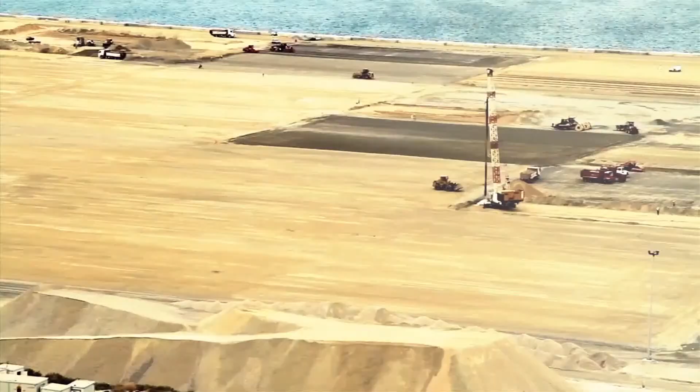What if you could reduce your construction carbon emissions right now? Building materials are responsible for 11% of global carbon emissions, among which 19% accounts for the reinforcing bar's embodied carbon emissions in reinforced concrete structures.

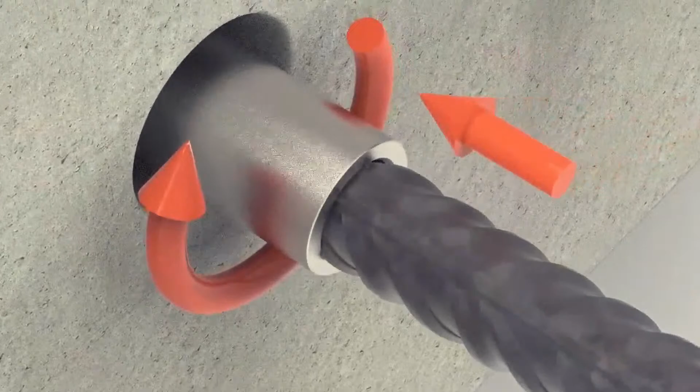However, a sustainable solution already exists to change the future of our industry. STARS splicing technology allows reduction of steel. Thanks to its 35 years of pioneering experience in splicing systems, BARTEC Group has designed the Linction parallel threaded couplers, a very high-quality solution that allows saving 20% of rebars and their associated carbon emissions for an immediate positive impact on the environment.

This splicing technology has already been used for many applications in international public and private construction projects, with top-level safety requirements, such as nuclear sites, bridges, government buildings, docks and sea foundations, stadiums, high-rise buildings, and metro lines.

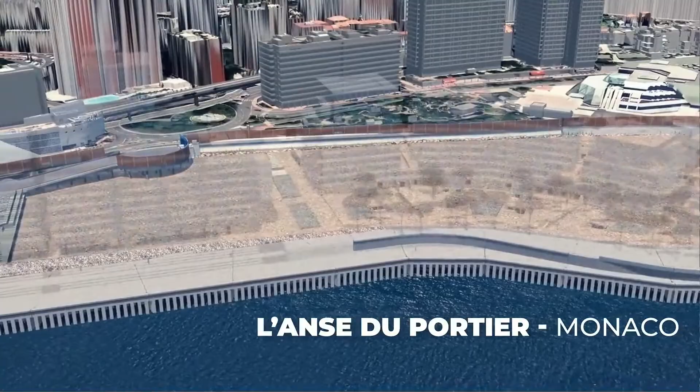On the railway extension Grand Paris project, 3,000 tons of steel were saved thanks to the Linction splicing systems. The number of trucks used in traditional overlap was consistently reduced. Thanks to STARS, the building sector can be brought in line with a net zero target sooner than expected.

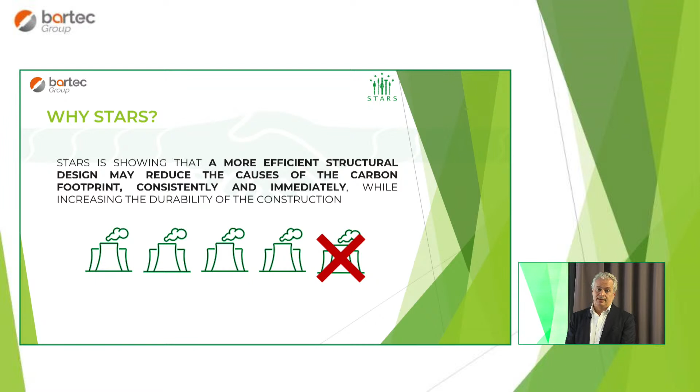Whereas this project is trying to show that the issue can be faced since the beginning with a more efficient design in the design stage, because with an efficient design it is really possible to reduce what are the causes for the carbon emissions.

So it is quite meaningful to be here in Paris today because it is in Paris where reinforced concrete started, because this guy, Joseph Monier, he was a gardener from Paris, and in the half of the 19th century he had the need to try to give more strength to the pots that he was using for his gardening job.

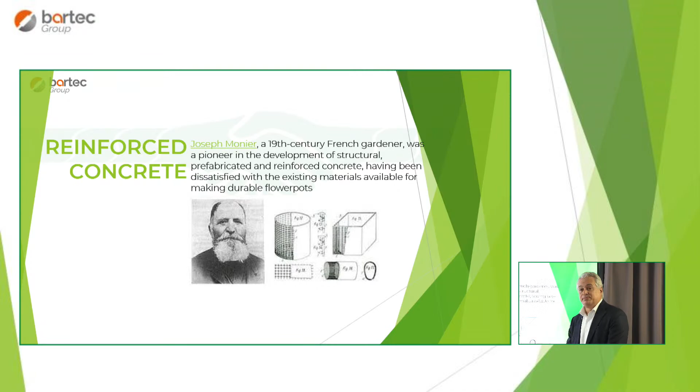So his idea was to put into the material for the pots he was making some rods, some steel, and this is when he patented this invention, which is seen today as the first example of reinforced concrete worldwide. So his idea was to make more durable flower pots. Durability, that word we will see today, is pretty much what we are trying to do again, and we will see during this presentation what can be done in this way.

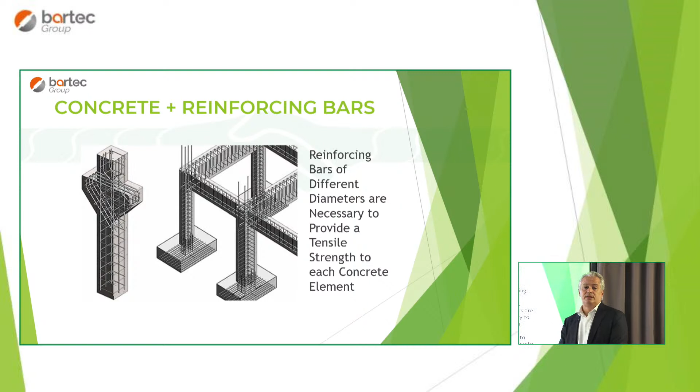So what happens is that concrete doesn't have really strength in tension. Concrete is pretty much designed for compression, and it's giving a very high performance in compression. But in tension, it's about 1/10 of the compression strength, and it is needed to add to the elements some reinforcing bars to make sure that it is possible to shape the elements according to the needs. So reinforcing bars can be considered the bones of the structure, and they can assemble.

They are normally manufactured in steel mills, taken to the job site or to a workshop where they are cut and bent, then assembled in the job site where the concrete elements are cast. This is necessary because the manufacturing of these steel bars comes in a specific length, normally 12 meters. They need to be cut, shaped, and assembled, and this job is done in the workshop.

So when you need to reassemble the bars, you need to join the reinforcing bars to create the cage. To join the reinforcing bars, there are three possible ways. The first way, the traditional way used in probably 99.9% of cases, is the overlap.

It has been accepted since the beginning of reinforced concrete structures that the reinforcing bars can be put together over a certain length, and that is the splicing between the bars. This length can be different. It can normally be 50 diameters, but could be even more for certain design cases. You can see this in any reinforced concrete structure - it's the typical way of connecting reinforcing bars.

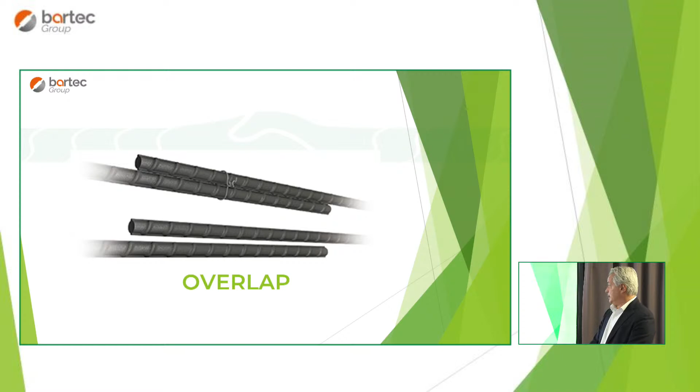The second possible method for splicing reinforcing bars is welding, which has been used for a certain period of time but is now not so much used, because to achieve a good connection of the reinforcing bars you need a specialized operator. You would also need to check the quality of the welding with methods that are not really practical on a job site.

The third method of splicing reinforcing bars is mechanical splice. Mechanical splice has existed for about 50 years, so it's not a brand new solution, and it is used in a lot of cases, mostly when the reinforcing bars are of a big size. The big size needs a very long overlap length, and this is when mechanical splice becomes very efficient and very much used.

Also, the fact that a mechanical splice can allow a lot of flexibility in design is making it more and more popular in areas with a lot of architectural ideas, adventurous design for futuristic structures - Dubai is an example. Dubai is a place where design is really taken to the limit with very innovative and futuristic structures, and there we can see a lot of need for mechanical splices to connect reinforcing bars in a very efficient way.

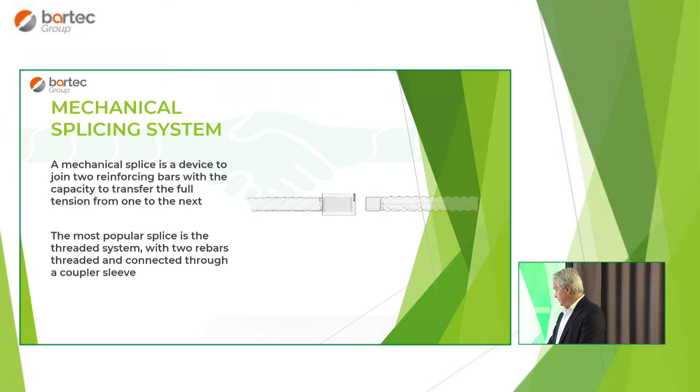But there are so many that it's possible to find in the market, which can be divided into two different families: the family with previous rebar preparation, meaning the reinforcing bars that need to be connected must first be prepared in the workshop or with specific machines that may also be placed on the job site - that solution is also possible. So first the rebars are prepared and then connected to the sleeve.

We can see here some examples of parallel thread or taper thread, or some grout threaded couplers, or in some cases couplers with upset edges of the bar. These are all cases where you need specific machines to work on the reinforcing bars before delivery to site.

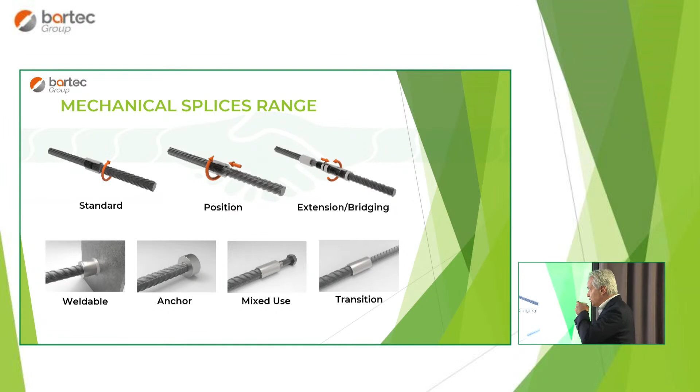So let's have a look at the typical projects where you can find mechanical couplers. I spoke before about Dubai because Dubai has a lot of high-rise buildings. High-rise buildings are one of the most typical projects because of the size of the bars—most of the time in the first floors they're 40 millimeters—but also train metro stations.

Nuclear power plants are probably the biggest projects with mechanical splices. In some cases nuclear power plants impose the use of couplers for construction of certain sections, docks, stadiums, big bridges. These are all the big projects one could think of with massive usage of concrete that come with mechanical splices.

So let's go through a bit more about the advantages of mechanical splices. Before I was talking about mechanical splices versus the typical traditional overlap. We can say mechanical splices are not a real alternative to the traditional overlap, because they bring some extra advantages that the overlap is not capable to offer. First of all, let's check the technical advantages.

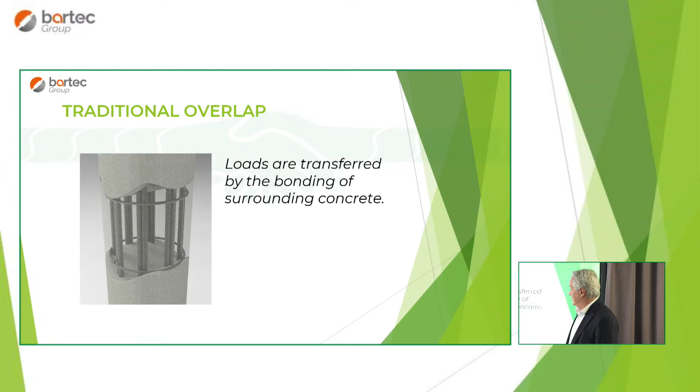So talking about the comparison with the traditional overlap: this is a column with an overlap, and one can easily imagine that once the concrete column is poured, the transition is guaranteed by the concrete, because the two reinforcing bars are not connected together—just the embedment length of the overlap is accepted as creating this connection. Once there's a design issue that's not done properly, there might be a situation like this, where without the surrounding concrete there's no way the two overlapped bars can stay connected together.

So obviously, as I said, there are thousands and thousands of projects done with overlap, but the area of overlap needs to be protected with extra stirrups, extra steel, and has to be properly designed—not like this one, which is very, very poorly designed.

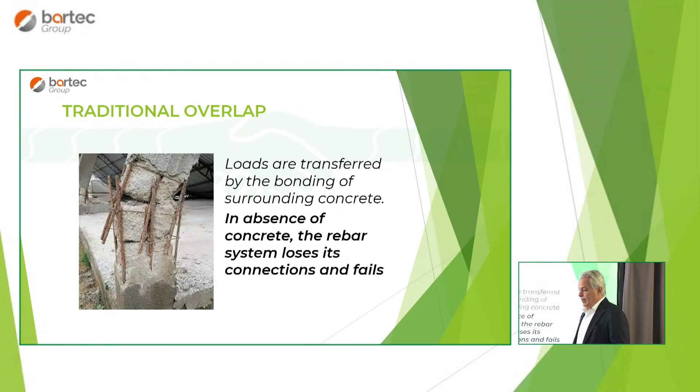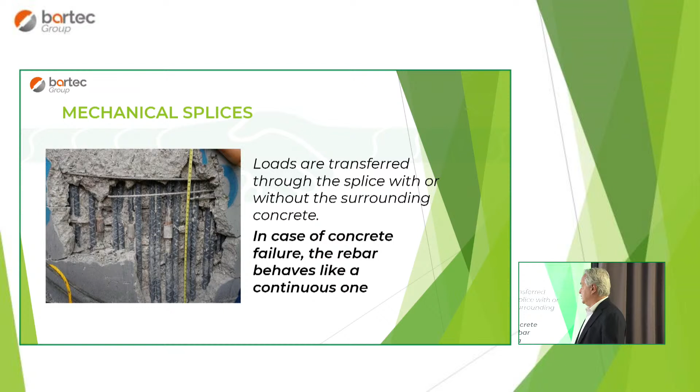So what does this mean? This means safety, obviously, because the fact that you have a bone inside the structure, you can also, as a structural designer, design the places where you want the structure to fail in case of accidents, in case of earthquakes, so that these plastic hinges can be easily designed also with mechanical couplers.

Second technical advantage, still talking about safety: it is a well-known and certified technology. Well-known because it's existed for 50 years, so there is no mystery about the fact that mechanical splices can offer very good performance. And certified - why is certification important?

First I want to thank Gareth again, who gave me the opportunity to help on this part as a certification body. Most of the projects I was mentioning before are public structures - high-rise buildings, bridges, trains, metro, nuclear power plants - projects where an accident would not be allowed. It would mean a lot of casualties.

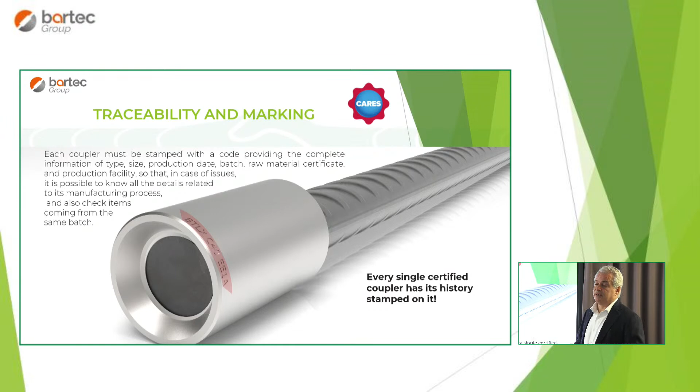The batch number will tell the story - the day the coupler was manufactured. The batch number also tells the story of the steel of the coupler, so it is possible to go and check the material certificates of the coupler. So the whole process of production is written on this little mark on every single coupler.

Once certification is done, certificates are issued and kept up to date every 6 months. These certificates give all the information about the approval of the product. So again, safety - the result of this process is that when a designer specifies a mechanical splice, a certified mechanical splice will deliver the performance that the designer is expecting. This way, the safety of the structure is granted.

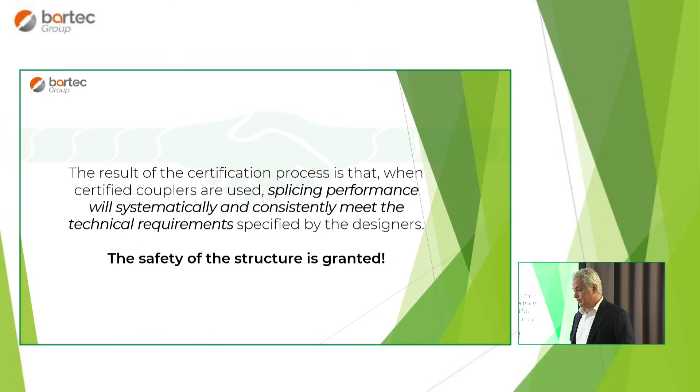Other technical advantages: using mechanical couplers will not create the need for a section where the reinforcing bars are overlapping. So basically you divide by 2 the number of reinforcing bars in the connection area, the splicing area, especially on big diameters. This is called congestion, and it has a major impact when there is too much reinforcing bar in the section, affecting the flow of the aggregates in the concrete element.

So the fact that there is less steel means the element, even in the splicing area, keeps the same properties as the rest of the element without changes.

Another technical advantage - what is the idea behind the traditional overlap? As I said before, the loads are transferred because of the surrounding concrete. We have to think that with mechanical splices, the surrounding concrete is not considered when they are tested in the lab. This means that once they are cast into the concrete, there will be some extra strength provided by the surrounding concrete - the same concrete that was keeping the two overlapped bars together also gives extra strength to the bars that are spliced with a mechanical splice.

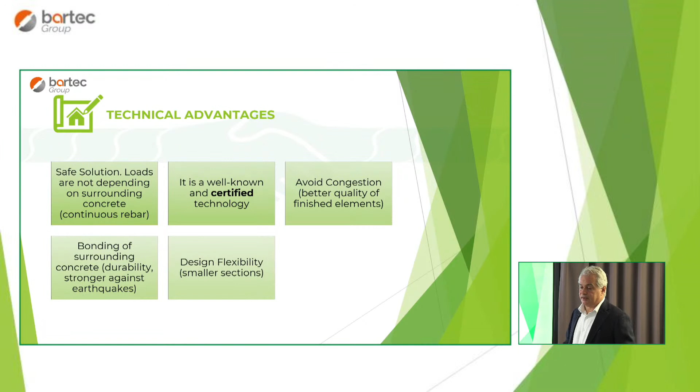Design flexibility, smaller sections - again, the fact that you have less steel and don't have all the doubled reinforcing bars in the splicing area allows designers to keep the section smaller. Formwork saving.

One of the typical applications of mechanical couplers is construction in phases. The fact that it's possible to interrupt the structure whenever needed also allows preserving formworks to be drilled, prepared, and discarded after they've been used one time. So this is pretty much the technical advantages of mechanical splices.

Now let's go into the constructive advantages, where constructive is a more practical area of usage of couplers. With mechanical splices, it's possible to push further the design for prefabrication, meaning it's possible to make prefabricated elements that are connected together through mechanical splices.

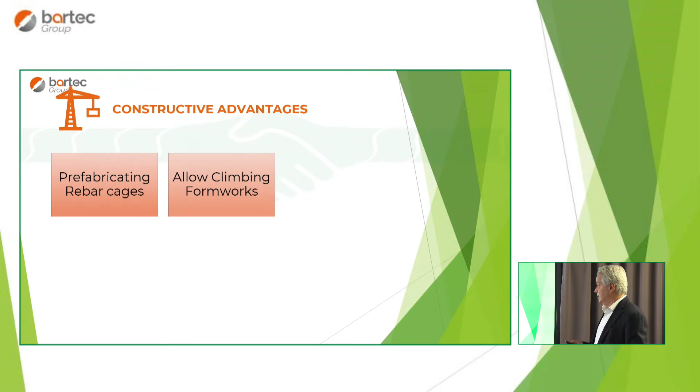Climbing formworks are a specific solution for high-rise buildings, and they wouldn't be possible without a system removing all the reinforcing bars coming out horizontally for the construction of the slabs in the second phase. So this is one very important application. The same applies to walls, diaphragm walls, and top-down structures. They are typical applications because of the practical advantages they can provide.

Another interesting point is the fact that - I'll use an image to explain this. As I said before, reinforcing bars have a standard length of about 12 meters.

So if we think, for example, of a structure that is 60 meters high, and we consider reinforcing bars of 40 millimeters, every reinforcing bar will have an overlap length - 50 times 40 makes 2 meters of length. So this means that for every bar, 2 meters are lost for the overlap. So for 60 meters high, making things easy, there would be splices at 1, 2, 3, 4, 5 points - five times there will have to be a cast, an interruption of the structure with new preparation for the next step of the column.

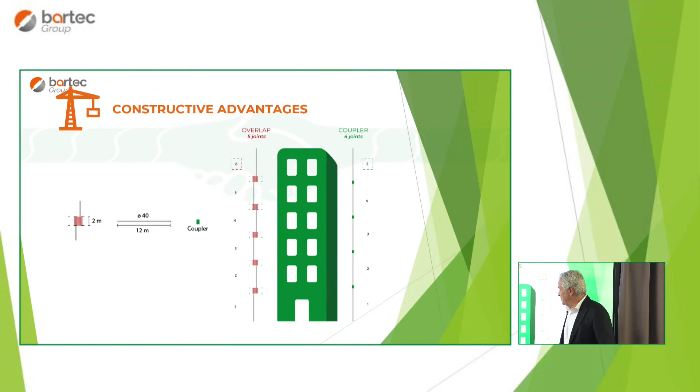This is obviously made with 40mm bars as an example. It's not normal to have a 40 millimeter bar after 50 meters height of a building, but that's just to explain. It could be in a bridge, or any element, but basically the fact that you can reduce the size of the overlap will automatically allow you to extend the length of the reinforcing bars that you have.

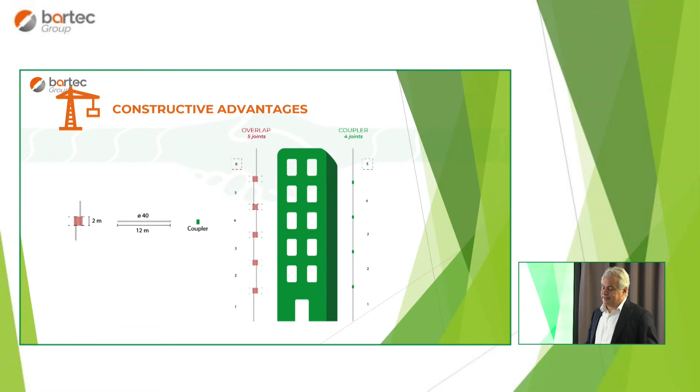With some advantages also for waste, because if you have 5 phases compared to 4, you will add 20% more of the system of bars, with the waste and everything else.

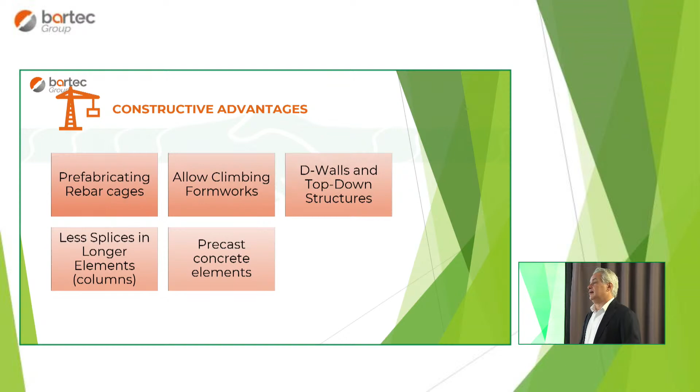So the next constructive advantage is precast concrete elements. It's typical - it's not prefabricating the cages, but prefabricating the concrete elements that are then connected together on site. There are mechanical splices designed to allow the connection of prefabricated concrete elements.

Last but not least, safety. In an ideal world, on the job site with mechanical couplers, you wouldn't see all these bars, all the reinforcing bars coming out of the structure, making the site much safer.

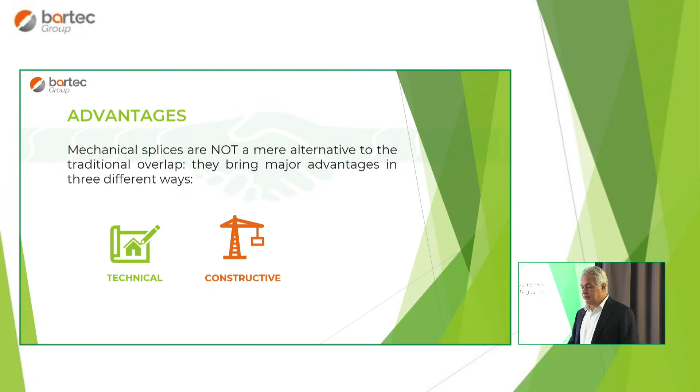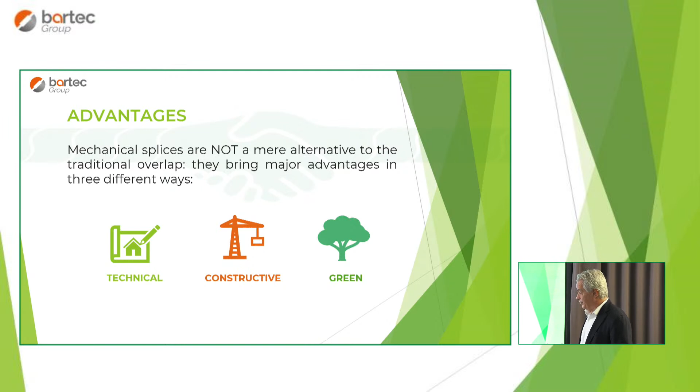So far we've been talking about mechanical splices. All these advantages, technical and constructive, are very well known - it's a product that has existed for many years. Today, the idea behind the STARS project is to introduce a different point of view of mechanical splices, because besides these two technical and constructive advantages, mechanical splices can offer also a green advantage. We are going to see what the potential can be and how this point of view can work, can be faced.

I was saying at the beginning of the presentation that we are facing an emergency today of carbon emissions that need to be reduced at least 30% by 2030. Steel is one of the biggest contributors to CO2 emissions worldwide, because its impact has been calculated at around 8% - all steel, not just construction steel.

With this situation, what can be done? Obviously, the obvious way would be to reduce the emissions coming from the production of steel, which is not so easy. All steel manufacturers are working on that, but the process of making steel involves a lot of energy to warm up the ovens to make the steel, and this energy comes with a cost.

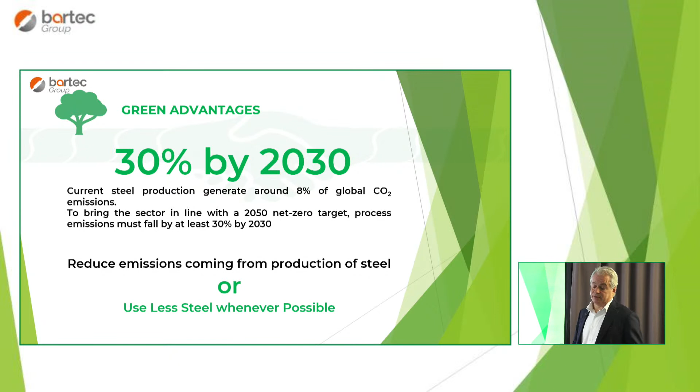One thing would be to reduce the emission coming from the steel, or the other possible thing that we can do now is to try to use less steel whenever possible. This is an immediate solution, because the time that it's going to be taken to find ways and means to reduce the emission of steel, there is a time span, but using less steel can be done now, and this is what we are talking about today.

Because so far mechanical splices have never been seen as a possible vehicle to reduce the amount of steel in the concrete elements. But the fact that if there could be less steel in there, less steel used would also mean a lot of different advantages, that reduction of emissions also on trucks, less trucks on the roads, energy for loading, unloading. So this would mean to have less steel in concrete elements. We will see how in a second.

So this is only a first step that we're taking today with the STARS project in this way, thinking that mechanical splices, and I said it already on purpose a few times, is a product that has about 50 years of history. So it's a very well-known product. We're not talking about something new, no, it's a product we know very well. We know very well how it works. There are norms, there are certifications, it is safe. Never seen an accident with mechanical couplers, and all this makes this product a good candidate for helping, and if this product is also green, that would be a perfect candidate, because we know that technically speaking it works very well.

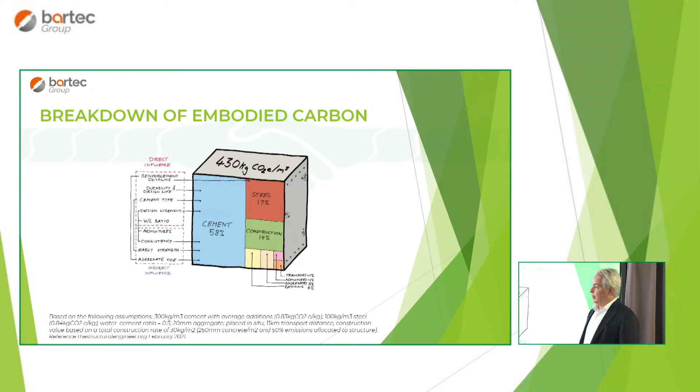We will see. This is a breakdown of embodied carbon in a building, where we see that almost 20% is coming from the steel reinforcing bars. This is supplied by the structural engineer, February 2021, and this is the breakdown for a finished building, so everything included after construction. 17% of emissions of embodied carbon is depending on steel reinforcing bars.

So starting from this, we will see after what can be the impact from the solution with splicing systems. We will start now, we will go more into the meaty part of this presentation, just trying to understand the potential of mechanical splices facing this green emergency.

Let's see, first of all, the weight, in terms of weight. So on one side, we consider, according to the different diameters from 16 to 40, the weight of the overlap solution. And on the other side, we will compare it with the weight of the equivalent coupler that is connecting the two bars. So these are the couplers.

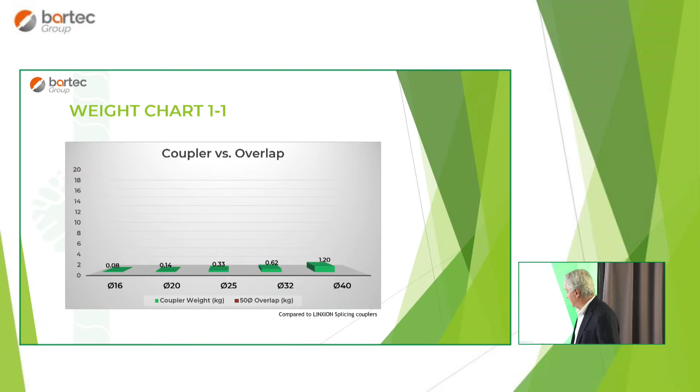So this is in kg, so it's 1.2 for the 40 and 80 grams for the 16. And we will see the equivalent reinforcing bars for the overlap would be this. So there is a huge difference. The more the diameters go up, the bigger is the difference between the weight of the coupler and the weight of the steel. So you see, for the 40 millimeters, from 1 kg to 20, it's 1/20 of the weight, same for the 32, and so on.

So this is already good. This gives an idea already of what we are talking about in terms of steel. For each splicing, considering the building has thousands of splicings, each splicing there will be an equivalent, the mechanical splice compared to overlap is giving this quite impressive difference in weight, considering 50 times overlap.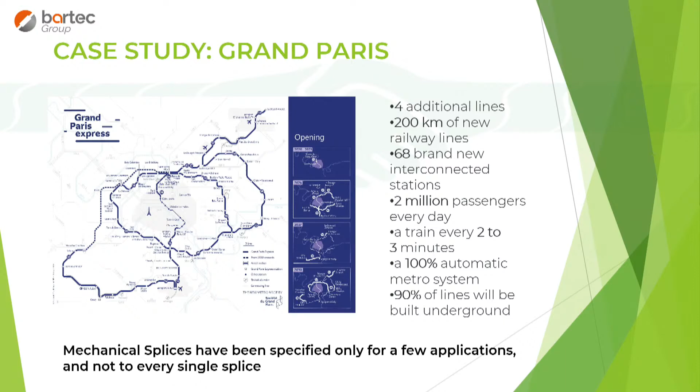Let's try to see the impact of this on an actual project. We are in Paris, so this is coming, it's next to Paris. We made a study based on the Grand Paris project, which is a railway extension all around Paris. In this project, mechanical splices are very much used, but they cover just a little portion, not all the overlap have been replaced by mechanical splices, but just one part of it. But since it's a massive project, only for 2021, there were more than 300,000 couplers delivered to the job site.

Between 16 and 40 millimeters, so that the rest of this study will consider the range from 16 to 40 millimeters in terms of diameters of the reinforcing bars. So the idea was, okay, we know that more than 300,000 couplers were delivered to the project. The idea was to say how many tons of rebars were saved because couplers were used.

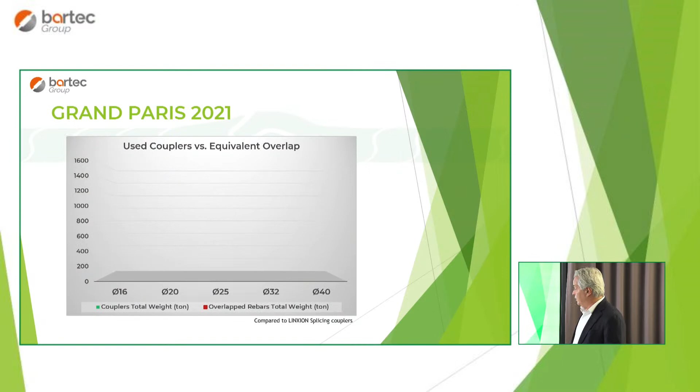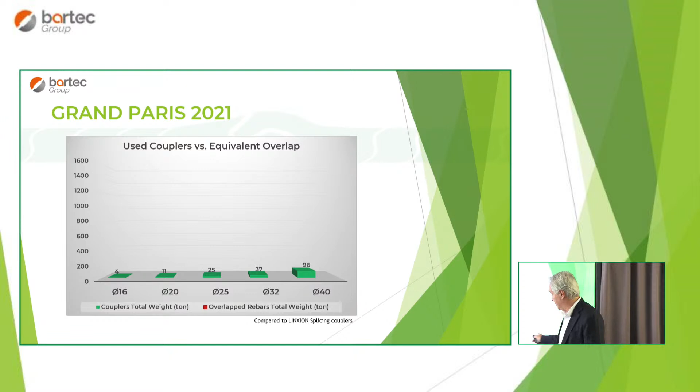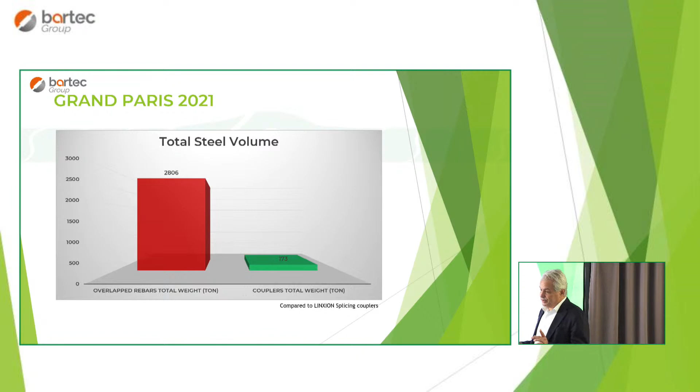We go and see it. So again, we consider only the weight of the total weight of the couplers of these 320,000 with a breakdown per diameter. This is in tons, and we see the total weight of equivalent steel that has not been used, but if it was used, this steel, we would have this. If we put all the data together, we have that 2,800 tons of steel were not used, but only 173 tons of steel were used.

So we reduced, because couplers were used, there was a reduction of 2,600 tons of rebar, of steel.

This is already impressive, but is coming, not as a surprise, but let's try to understand what it means. It's not just removing the steel and having a saving in emissions of CO2. By the way, for this study, 1.85 tons of CO2 per ton were considered.

Also for couplers, I mean, they have been put facing the same. But what is important is the fact, the percentage, that 6% of CO2 or 6% of weight is saved when using one solution with mechanical splice instead of overlap. But this is not the only advantage, because the fact that there are

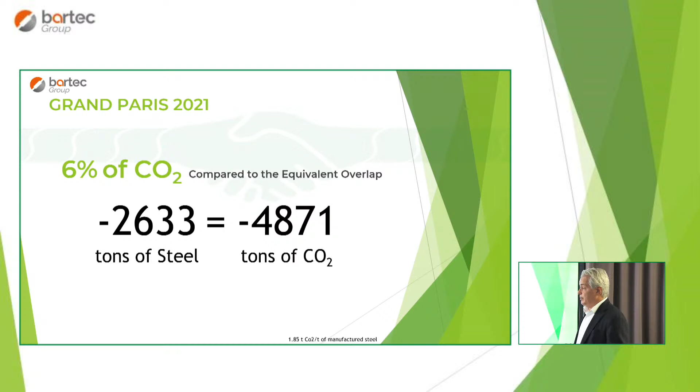2,600 tons less of steel on the site means that this steel never had to come to the site, and we have to think that steel goes onto trucks. 2,800 tons of rebars should be transported, and the trucks normally transport 20 tons per time.

So we'll see that from the factory, from the steel mill to the steel fabricator to the workshop, from the workshop to the job site can be very far. It's not always next door, but this means that the weight of couplers of these 320,000 couplers was loaded on 8 trucks, and the equivalent overlaps would be... take some time, because

108 trucks. This means that there were savings in steel in the structural elements, because using one solution rather than a different solution will have a positive impact on things that one would not think of in the first place, because all these trucks need to be loaded and unloaded twice, and so there is energy saving for loading, for unloading, and traffic around the Paris area is crazy.

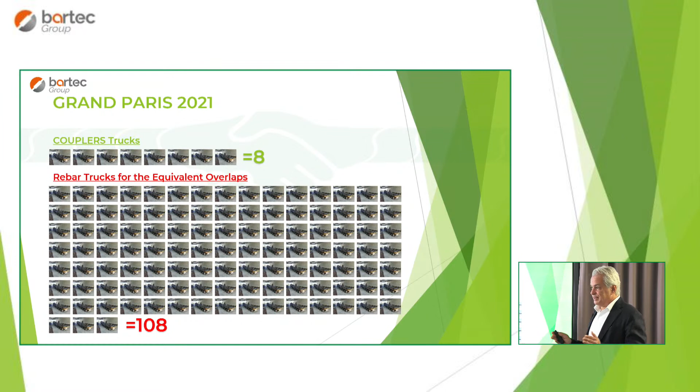So removing all these trucks - and again, we are talking just about a little portion of the project, not all of it. If one considers every day all the trucks with all the overlap going to the job site, it's much more than that. So fewer trucks on the road means obviously less traffic, less time, energy, and greenhouse gases are obviously reduced.

Again, this is 2021 Grand Paris. So starting from that, we saw this, we made these calculations that we were quite impressed about, and we wanted to go a little bit further, because it is a fact that mechanical splices are a green solution only after checking this compared to overlap.

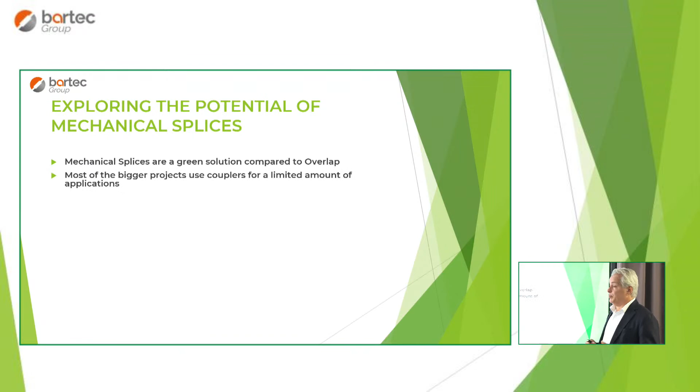What we see is that most of the bigger projects just use couplers, mechanical splices, only for a portion and only for a limited amount of the application. Mechanical splices are a great technical solution, and they are certainly superior to the overlap. We saw before all the technical advantages that they can bring. Certifications are guaranteeing the safety of the system, but we don't have to forget that one will say, 'But if everything is so good, why aren't they used everywhere?'

Because they are considered an expensive solution. So designers believe that, and also the market makes them believe that it is expensive to use a mechanical splice compared to the overlap. But we will see later a little bit more about the cost, because this is a very interesting point.

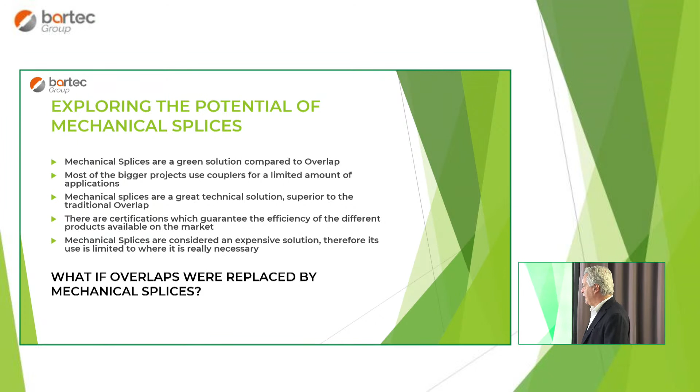We wanted to go a little further into our study, and we thought, what if the overlaps were replaced by mechanical splices? What if a structure was made only with mechanical splices?

The first challenge is how many splices there are in a concrete structure, because this information is not easily available. We needed to find a method to get this information, because the number of splices will depend on the type of structure, the norm used, the steel grade, the designer, who has his own style for designing concrete elements, the construction code, and the type of application. So there are a lot of variables.

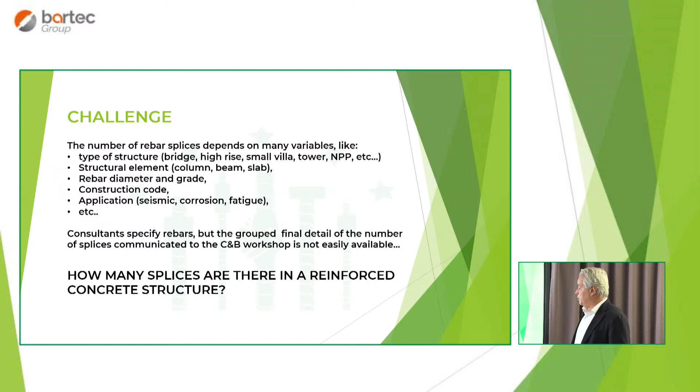So it's extremely difficult to calculate beforehand, or from the design, to say the average is one splice every X amount of meters. So the idea was to go upstream and check projects with couplers.

For big diameters, 32 and 40 millimeter splices exist. There are some projects where designers demand a mechanical splice on every single connection between the reinforcing bars, so no overlap allowed. Checking a few of these projects, we came up with the result that there is one splice every 6 meters of bar, on average, just checking the existing, accomplished projects.

The issue was between 16 and 25. So the idea was to analyze the data coming from the people doing the cut and bending on the reinforcing bars, at the very last step before the assembling of the bars, checking all the logs and data on the machines that cut and bend the bars.

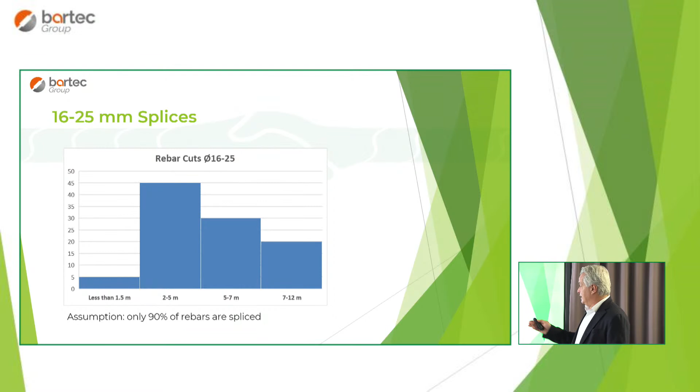Thanks also to Ariadis, that gave us support and made all this data available to us, we could make the stats of the actual cuts of the bars for a few projects. A few projects were grouped together, and the cuts were clustered, from less than 1.5 meters to 12 meters. This is a typical breakdown from a lot of projects grouped together.

Basically this shows that 45% of the bars cut are between 2 and 5 meters, 5% is less than 1.5 meters, etc. So this is the distribution of the cuts of the bars in the project.

We made an assumption that not all bars are spliced, that only 90% will be spliced. And we say there is zero splice for bars less than 1.5 meters, meaning that is like scrap, not used for assembling cages. One each 4 meters, one each every 6 meters, and one every 10 meters.

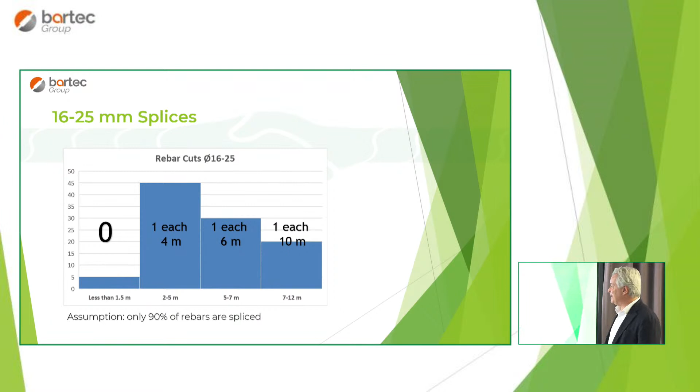Then combining this together with the quantities - this isn't the subject of the day, but curiously, after all this data was analyzed and put together, again between 16 and 25 millimeters, it came up, surprisingly, that there is one splice every 6 meters of rebar.

Once we have this information, we're capable of understanding how many splices we can have in a structure. This is a very powerful tool, because now, just based on the design and the breakdown of the steel rebars needed for a project, we can say beforehand how many splices we'll have, in a quite accurate and still conservative way.

For example, if we take this, we had a breakdown of an 18-story building that was about to start construction, with a very clear breakdown of the quantity of steel that was going to be used. So we converted all these quantities to splices, and we could compare.

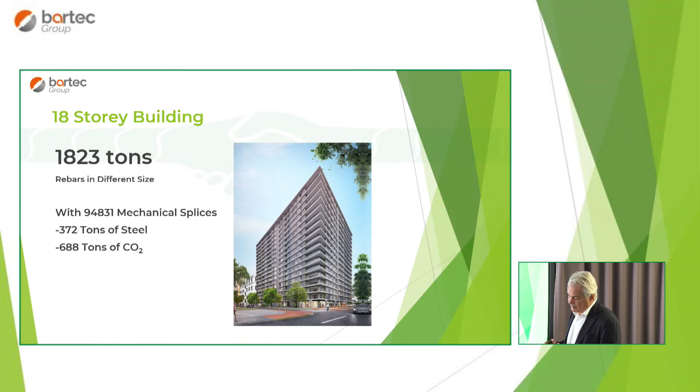We found that there are about 95,000 splices in this structure, and then we compared with couplers or with 50 diameters overlap. We see that when couplers are used, it's 20% less steel for building this 18-story building.

So it means that every single splice after 16 millimeters, bigger than 16 millimeters, every single rebar is spliced with a mechanical coupler.

With this powerful tool, knowing that you have on average one splice every 6 meters of reinforcing bar, we can play a little more. We did this exercise, let's call it that, in UAE, for projects we connected and know quite well, because one of the first objections to this project was that in Dubai everybody already uses couplers. I got this objection from someone in the government saying, 'We already use it, so what are you coming to tell us?' I said, fine, let's see.

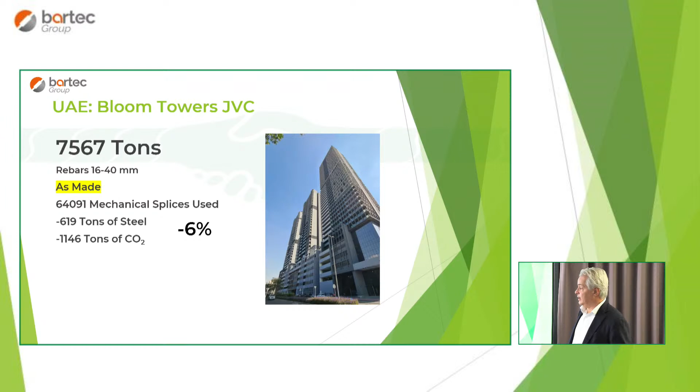Fine. Let's see if they had used couplers for the whole project instead of just a small portion. There would be 464,000 couplers, a very large quantity, with 18% saving. So it's true, they already use couplers and already save steel because of them, but they could save 18% and not just 6%.

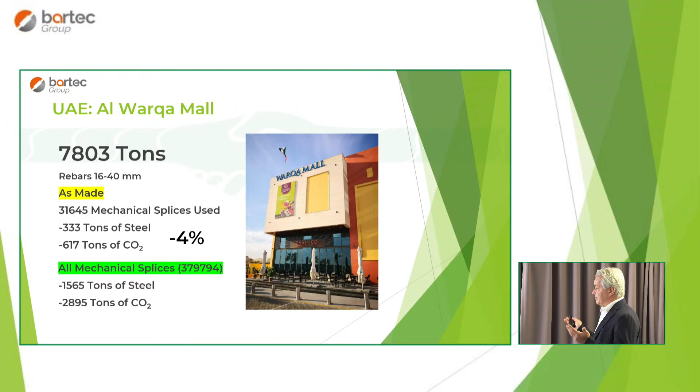We made the same exercise for a couple more projects. For example, this mall used 32,000 couplers, 4% saving still. We made the calculation: with 380,000 couplers or splices, comparing with the overlap, 20% could have been the saving if all splices had used couplers.

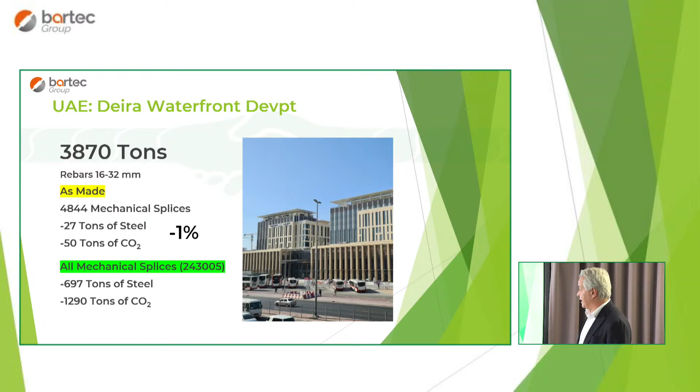Same for another project we checked. In this case, only 5,000 couplers were used. Yes, they already used couplers, fine. But if all splices had been done with mechanical splices, there would have been an 18% saving of steel in this project.

So we can come to some conclusions at this point. It is a very well-known and certified technology. It brings more safety. There are technical benefits, there are constructive benefits, all that I said before. The conclusion is that it's quite obvious that the more mechanical splices are used, the more steel is saved, and the fewer emissions we would have.

So at this point, that would be great if this could be done. But the question that comes is: at what cost can this be done? Because the solution is great under all points of view, but if it's not sustainable from the economic point of view, there's no point in it, as it would be too expensive.

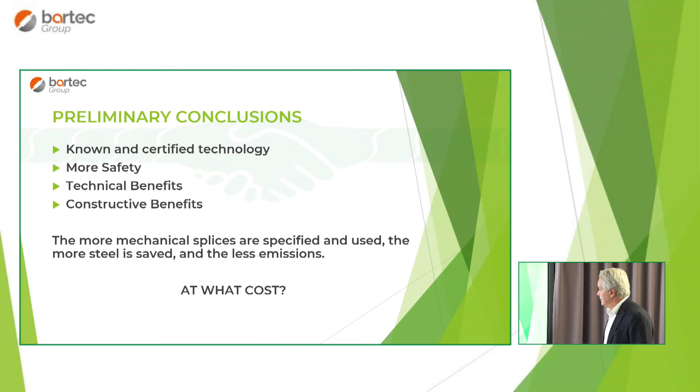So let's go check the costs, and again we'll compare the overlap with the mechanical splices from a cost point of view. Again we take Dubai as an example, because Dubai is a place where mechanical splices are very much used. So it's meaningful to consider a place where the product is already used and everybody is equipped to supply, one supplier or the other.

This has brought the cost of the mechanical splice down, treating it like one of the existing constructive solutions, not just a specific, just-in-case solution like it still is here in Europe. It's a place where mechanical splices are very much used, so the cost went down. We have a breakdown of overlap compared to mechanical splice, as of end of March, where we see that for 25 and below 32 millimeters the cost is pretty much the same, and after 32 millimeters the cost goes the other way around.

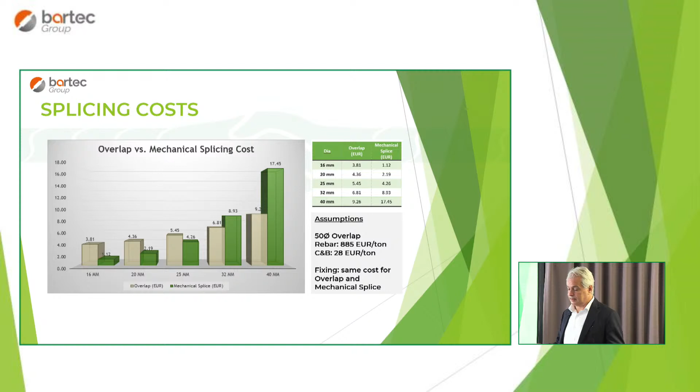We believe it's not correct to compare the mechanical splice to the cost of the reinforcing bar without considering a lot more factors that should be added to the cost of the overlap, like the steel rod that ties the rebars together, and as I showed before with the picture of the column failure, it's not a good design because there aren't enough stirrups — sections with overlap need to be protected by extra stirrups.

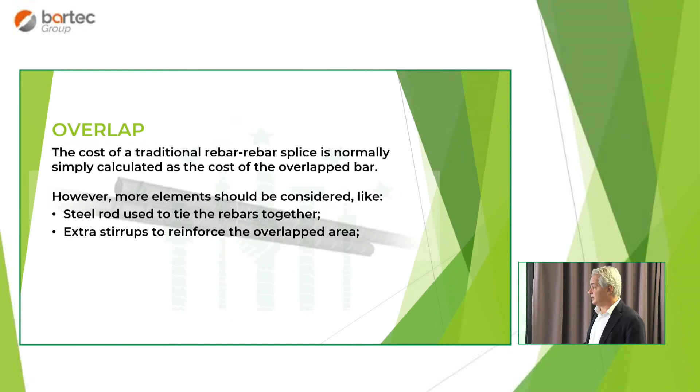So there is more steel that is needed to add to that area. We consider all the time 50 diameters for material cost, but it could be more than 50 diameters in some cases. In some areas they ask for 60 diameters, 70 in some seismic areas as well. So this can be higher.

Overlaps, rebars and trucks, loading and unloading. The more rebars you have, the more of these operations you have to do. So it's an extra cost that should be considered as well, on top. An overlap, we can also say, is not a certified splice, so it's something that should be considered, that we are not exactly comparing the same things.

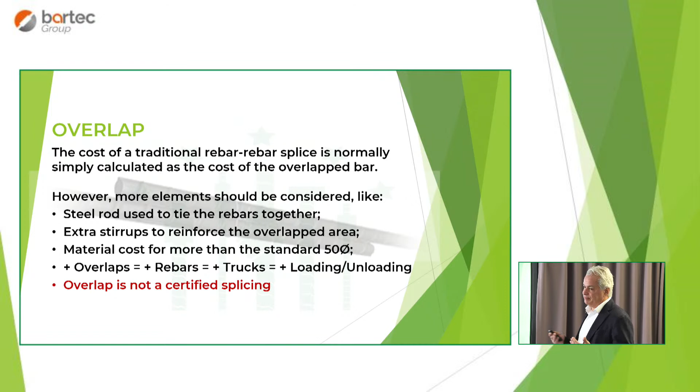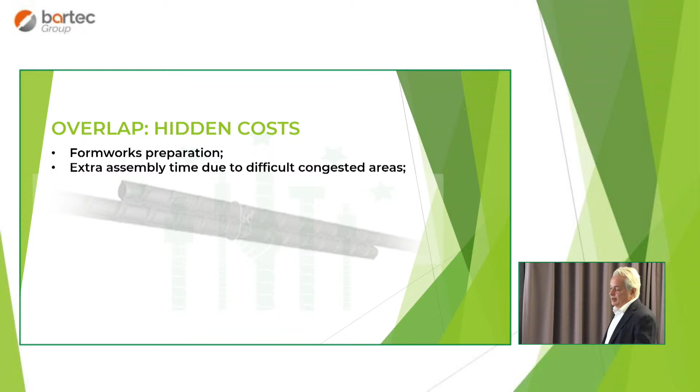There are also hidden costs, because once the overlap is installed, there is extra formwork preparation, congestion, and all the consequences of these disadvantages of overlaps that we mentioned before will be converted to extra costs that were never considered when comparing one solution to the other.

Longer operation, again, due to congestion. In some cases, climbing formworks can be used only with mechanical splices. If you don't use that, you need to build a high-rise building with reinforcing bars, and it will take days, and sometimes more months, to make the same structure.

The cost of steel can change, can go up, can go down, but it can go up during the project execution. It's not under control on day one on the job site. So the price is variable. It's not exactly possible to know. Nobody can tell beforehand how much an overlap is costing.

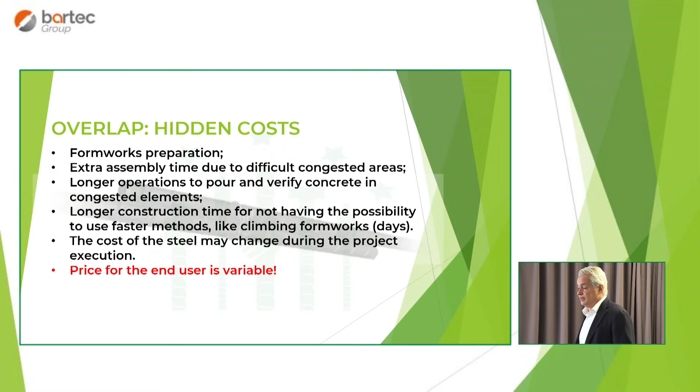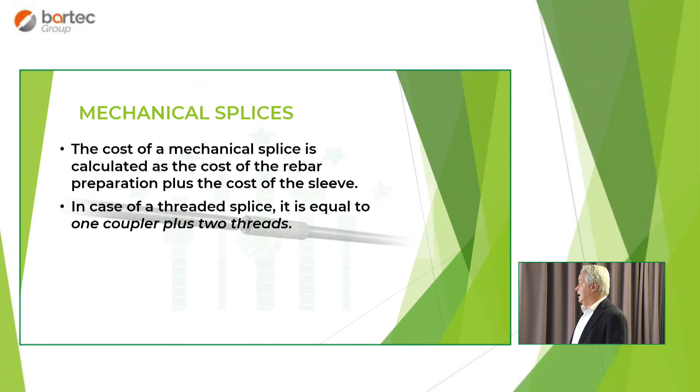Whereas with mechanical splice, it's very easy. It's a rebar preparation plus the cost of the sleeve. There are market prices for the splicing, it's not even discussed, this is how much it is for that. The cost is clear. So when you have a threaded coupler, it will be one coupler plus two threads, and that's it. We do not see any hidden cost after that could have an impact on the price of the coupler that should be considered.

So at the end, the price for the end user is fixed. So we have fixed price against variable price.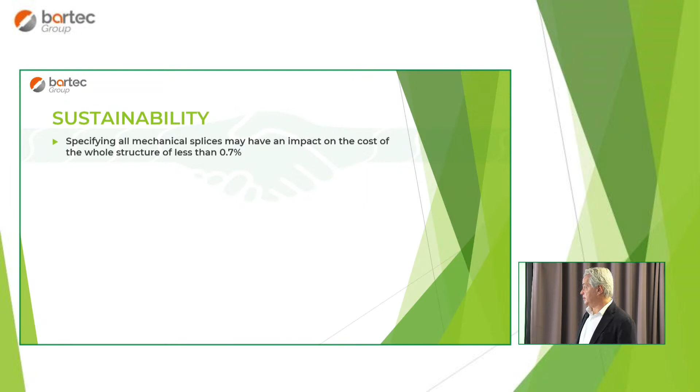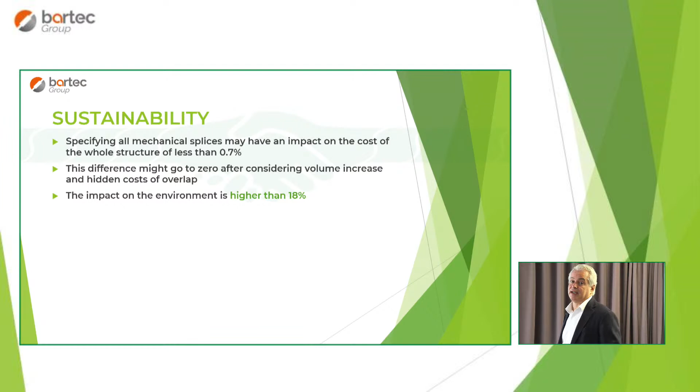Specifying all mechanical splices, the cost impact on the whole structure, as we calculated on existing and actual projects, is less than 0.7%. When we have, as we saw, a reduction of footprint, which is always higher than 17-18%. This difference could even go down to 0, because it's a small percentage, and if the market was completely converted to mechanical splices, the market price would certainly go down. So this cost difference is the top difference we can have today. So the impact is a more-close-to-zero increase of cost, but we have an impact on the environment which is higher than 18%.

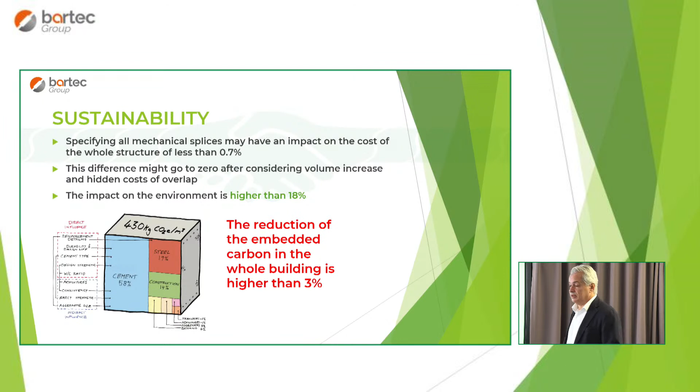And what does this mean? We take again this breakdown in the structure that we saw before, where the reinforcing bars were representing about 17% of the impact of the embodied carbon. If we see that using mechanical splices gives an impact of higher than 18%, then 18% of 17% would be higher than 3%, which is an impact coming just from using a product that already exists and that can be specified in the design stage. So there's nothing to lose, with all the advantages that we have been seeing up to now.

So what are the conclusions? We saw the organization, what they say, they ask to find means to reduce emissions and increase safety and durability.

And this durability is the same durability that Joseph Monier was looking for when he started with reinforced concrete.

So the conclusion of all this is that the immediate solution is there. There is an immediate contribution that can come from the fact that mechanical splices are used. The smaller the better, because all what we have been saying today has been calculated with small sized couplers, because there are all sizes, but the most popular couplers are of a small size. This is an immediate solution for the emergency, and it could be a solution just by specifying mechanical splices in every project. There is a direct, straight impact of reduction of carbon footprint.

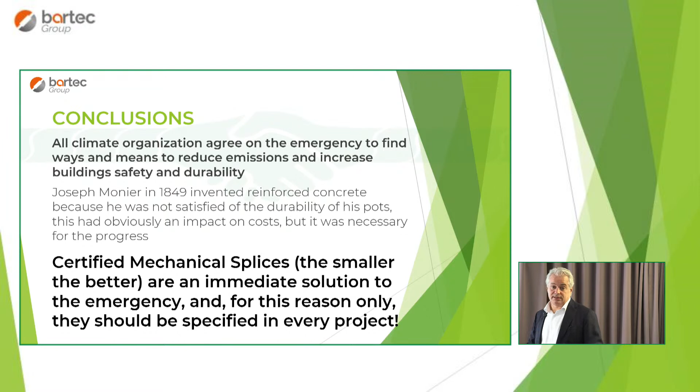So this is pretty much STARS. What STARS is, the splicing technology allows reduction of steel. The project was developed from BARTEC Group, from BARTEC Company, which is manufacturer of a splicing system. I believe that, Karine,

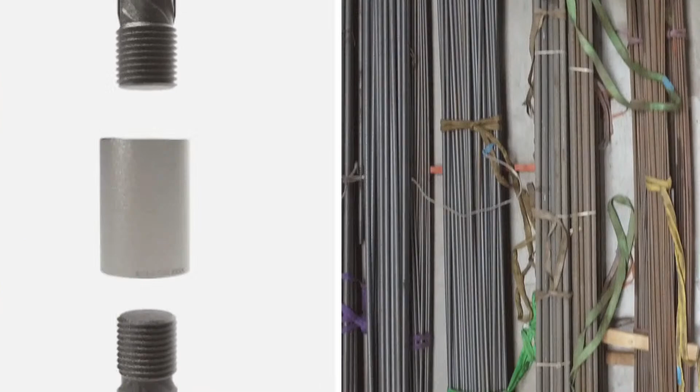BARTEC Company is a specialist of splicing systems for reinforcement bars, realized by connecting parallel threaded couplers to rebars, threaded with machines specifically designed and built by BARTEC Group in its Italian premises. BARTEC Company has 30 years of successful history and experience, and a team of engineers specialized in creating high-end technical solutions delivered to major concrete projects like metro lines, stadiums, bridges and viaducts, high-rise buildings, power plants, most of them public structures where a failure is not admissible. More than 10,000 structures were realized with its original technology without reported incidents.

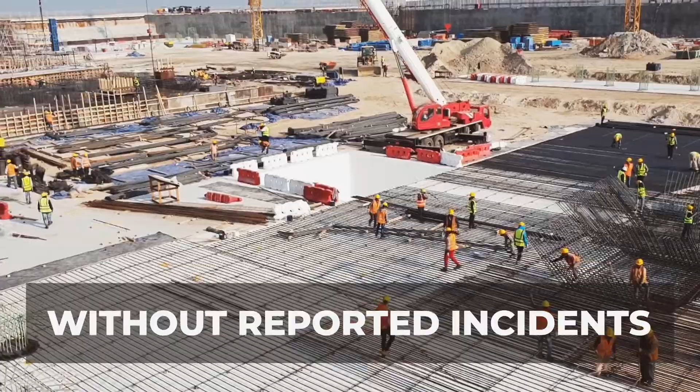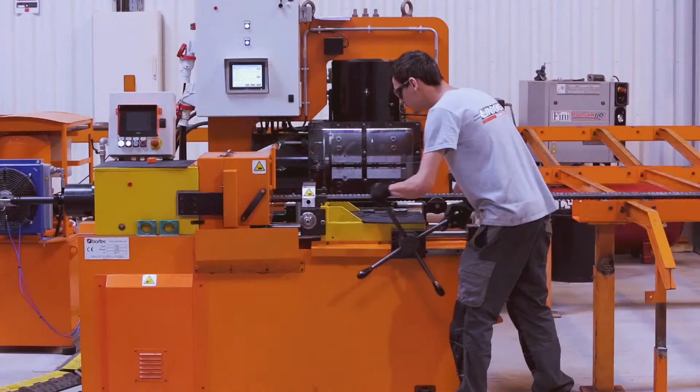The activity of BARTEC Company started in 1988 with its original design and introduction of the first parallel threaded splicing solution, realized through the combination of parallel threaded couplers and rebars, threaded through a 3-step operation of cutting, cold forging, and threading. The process as designed was assuring top capacity in the threading production process and top mechanical performance of the installed couplers, with a consistent tensile failure happening remote from the splicing area.

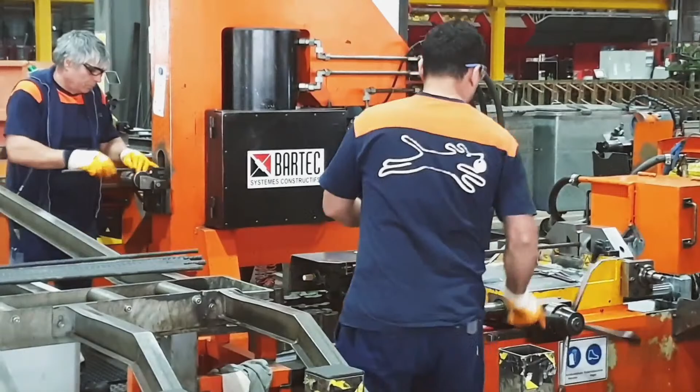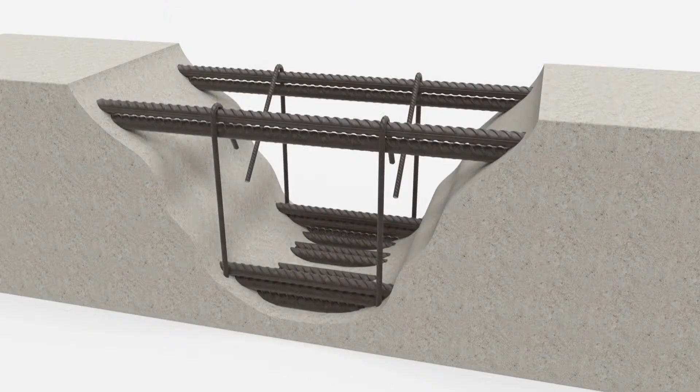BARTEC patent was an immediate success, and in order to supply all job sites requiring it, BARTEC Company chose the strategy to license two external companies to support its distribution outside Europe. By multiplying its commercial efforts in this way, what was soon called the BARTEC system became very quickly the most used splicing system in the world, replacing the traditional overlap splicing or previous expensive and inefficient splicing solutions. In 2008, BARTEC patent went to public domain, and several companies, mostly Asian, started to manufacture similar products, focusing on low cost rather than quality.

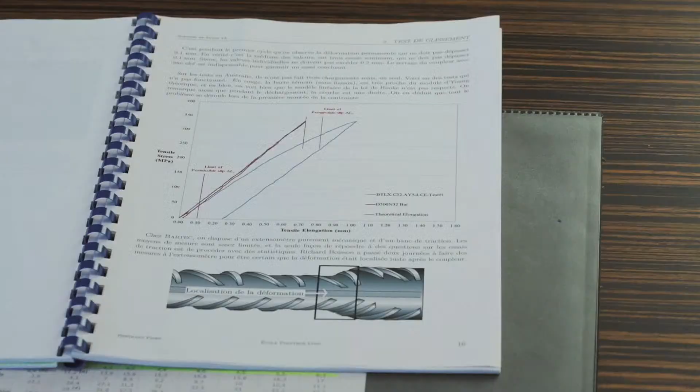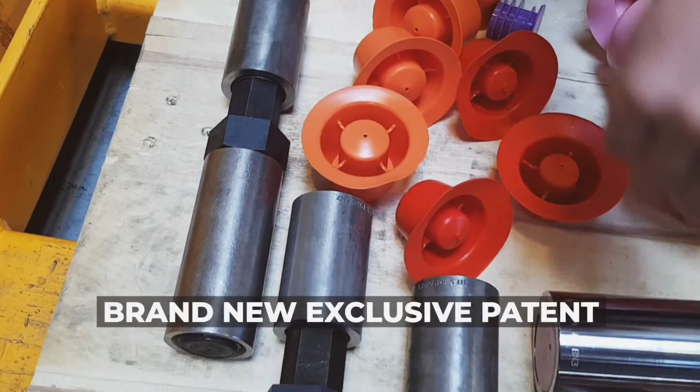BARTEC Company continued focusing on R&D to improve and provide high quality and certified solutions to ultimately guarantee safety to the structures. In 2012, a French industrial group, which later became BARTEC Group, incorporated BARTEC Company together with the Italian company Sergel, manufacturer of threading equipment, with the idea of relaunching BARTEC Company as a global supplier. It is thanks to this renewed strategy and in line with its tradition of pragmatic innovation that BARTEC Company could launch in 2013 its brand new, exclusive patent for a parallel splicing system called Linxion Pi.

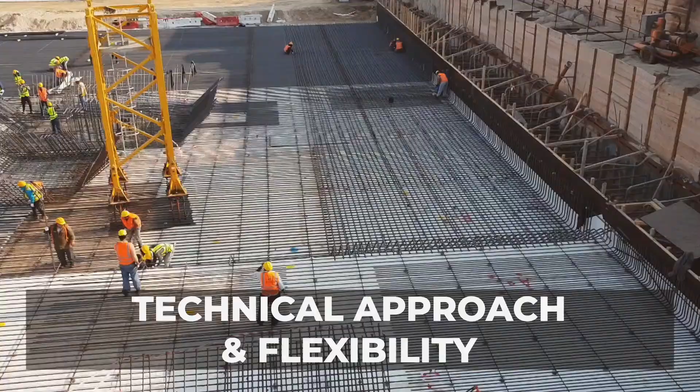Today, it is the top performing splicing solution of its kind in the market. This was another milestone in the BARTEC Company path, already populated with new technical solutions and patents. As a matter of fact, the mission of BARTEC Company is to build a strategic partnership with its customers, as BARTEC Company believes that in the present market situation, only a serious technical approach and flexibility can bring the right solution to job sites that are becoming more and more challenging in their request of cost-saving and high-quality performing solutions.

BARTEC Company results are exceptional. Within only 4 years, its turnover has doubled. Two branches started in UAE and China. Linxion was approved and used in nuclear projects. New distributors were found, covering a lot of international markets, and the growing trend does not stop. BARTEC Company, pragmatic innovation.